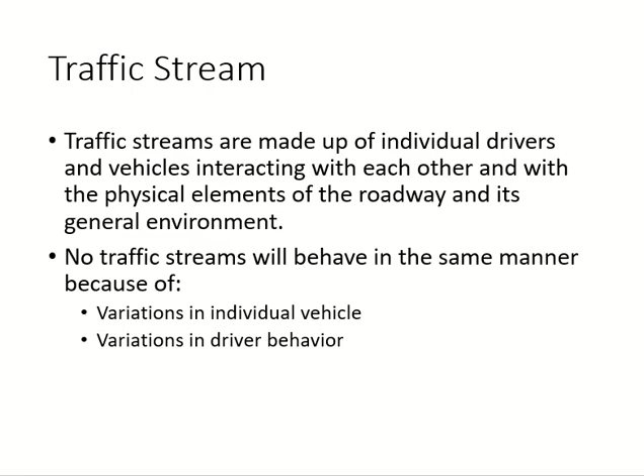Okay, last time we started with the first lecture, from chapter 5 and 6, focusing on this outcome of the course where you learn about the basic concepts of traffic engineering. We talked about what is a traffic stream, why it keeps on changing, the normal changes, the routine changes, and what traffic flow facilities we have. We have two types, interrupted and uninterrupted, and the main difference between them is the intersections.

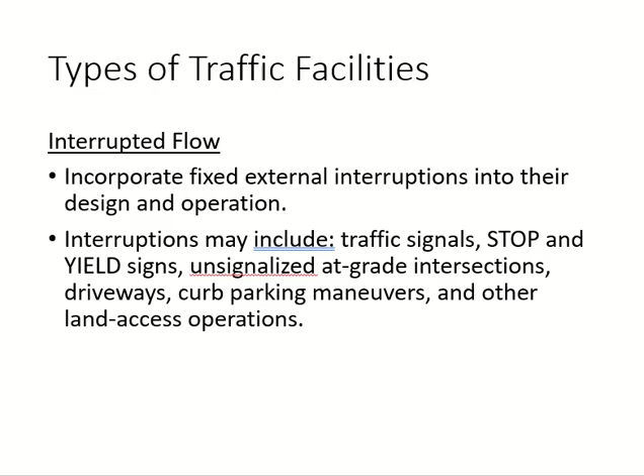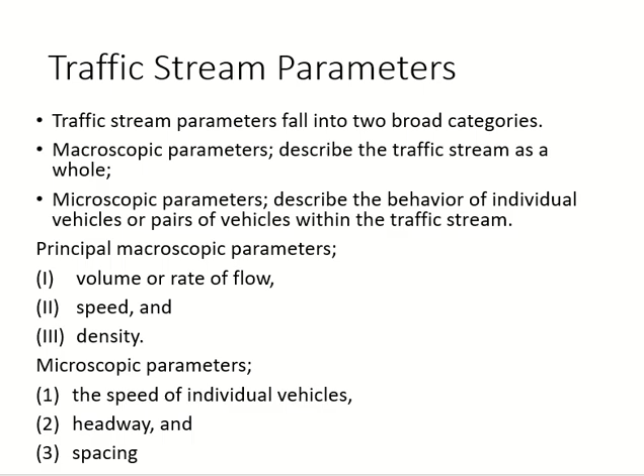Then we moved on to the discussion of traffic flow parameters. Again, they are divided into two types, macroscopic and microscopic. Macroscopic, you are looking at the entire traffic stream. Microscopic, you are looking at each vehicle maybe. And these are the three under each category.

We started with the first macroscopic parameter, which is volume. We define volume as vehicles per unit time. Based upon the unit of time, we can call the same thing volume, flow, or rate of flow, but all of them are vehicles per unit time.

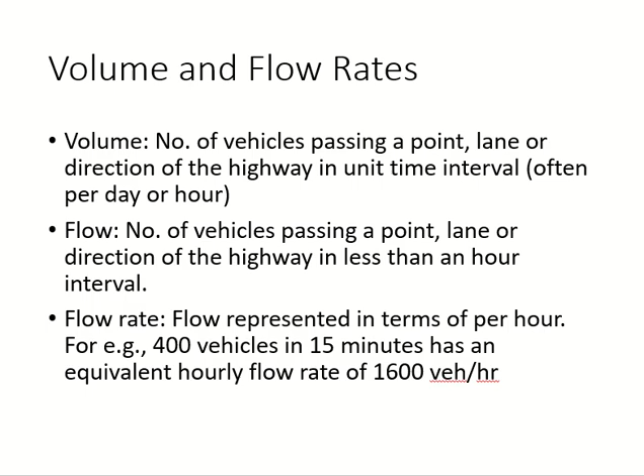So if you have a unit of time of 1 hour or more, it's volume. If you have less than 1 hour, it's flow. And how do we get the flow rate? Per hour, yes. And then daily volumes are used for planning purposes.

If you are planning a highway or a bridge in the future, then you need daily volume, and it basically gives you the total demand of the highway, irrespective of whether people are coming or going, or using it in the morning or evening. It's not detailed, just one number for the whole day.

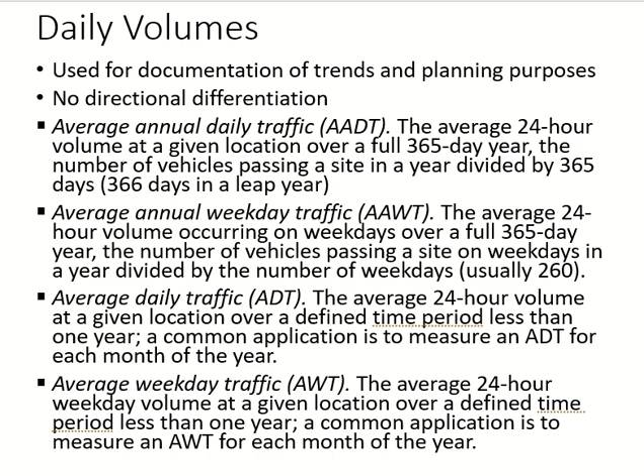And that can be averaged for the whole year including all days, AADT. It can be done for the whole year including only weekdays, AAWT. It can be done for all days less than 1 year, ADT, and all days less than 1 year only weekdays, that will be AWT.

We looked at this example where you can calculate the total for the whole year, because you have total volume, all days total volume, weekdays, you know the number of weekdays, you know the total number of days, and then you can calculate the ADT and AWT for each month as well.

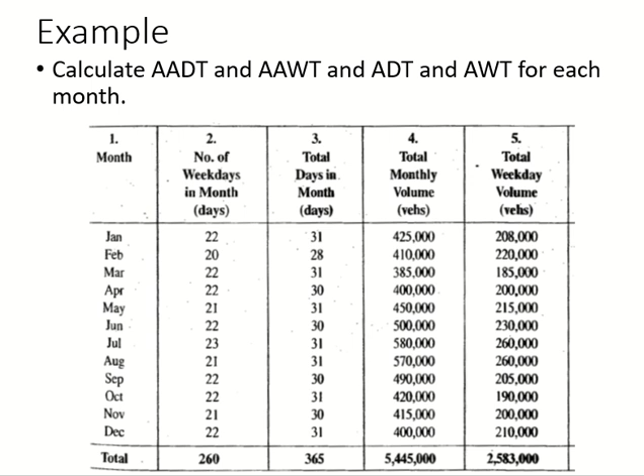But AWT and ADT can be for anything less than 1 year. So here the data is 1 month, the minimum unit is 1 month, so monthly. It can be weekly as well, and later on you will see some other ways of taking ADT.

Then we talked about hourly volume. Hourly volume is used for design. But you are doing the design for the future, and for future you have the total demand. So you have to convert that total demand into the design hourly volume you need. So we need the factors, factor for peak direction, factor for peak hour.

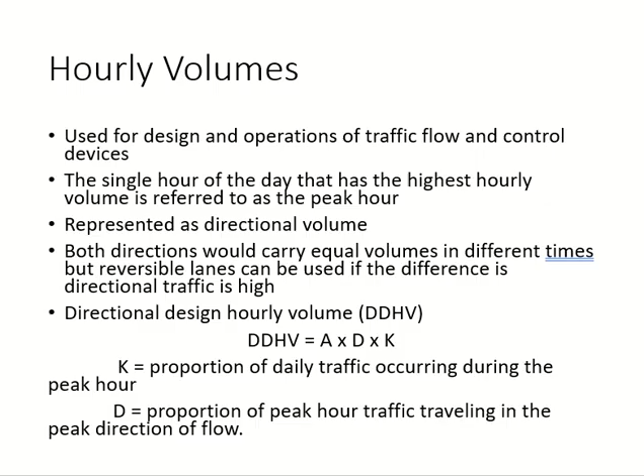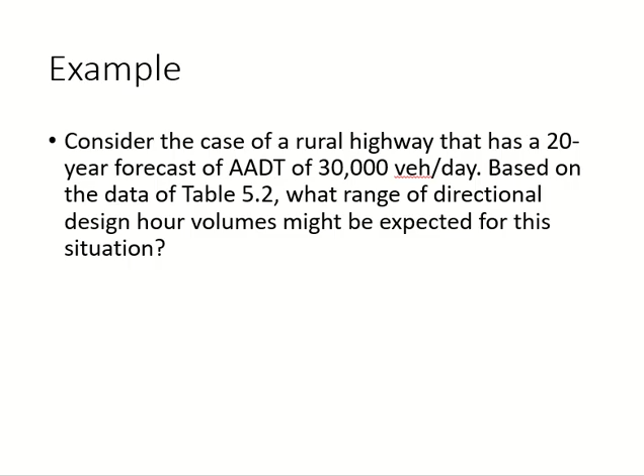And you cannot allow that much change in your design, that much variation in your design. So that's why the key point was these factors should be local. And they should be from the type of highway you are trying to design, because even here you can see it's not the same range for all highways in all areas.

So if somebody goes and says, I will build a new bridge on Sheikh Salman Highway, he cannot take the factors which are calculated using local street data. They will not match.

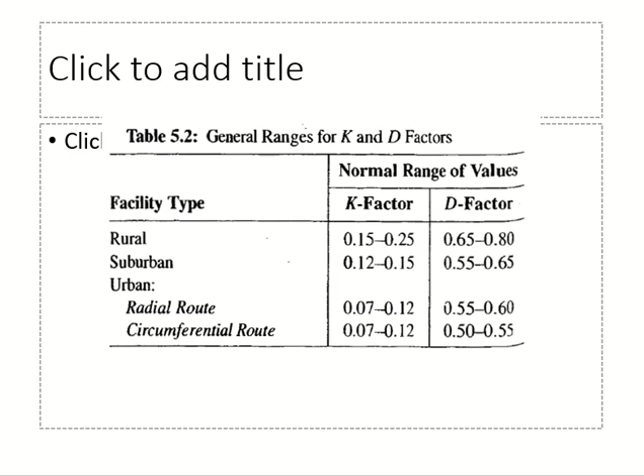So daily volume for planning, hourly volume for design. Then what is the role of flow? Why do we go into the hour and look at different intervals of the hour? How many vehicles, for example, in 15 minutes? Why do we need to do this if my design is complete with hourly volume?

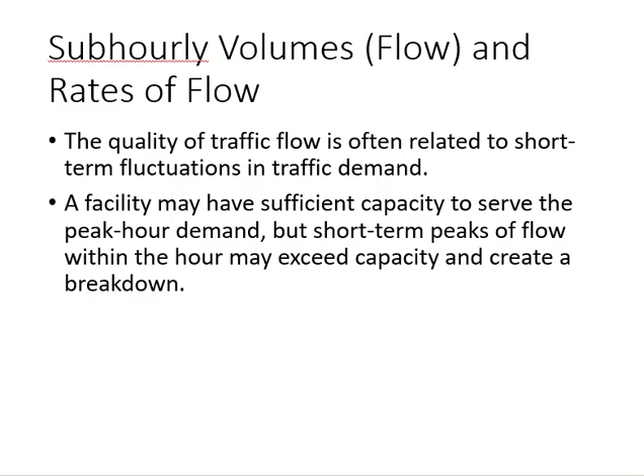And this is the example in which we saw the effect if you do not consider the flow. And I gave the example of a structure. So your total load can be the same, but instead of a point load, you assumed it to be equally distributed. Your building will fail not because you did not consider the load, but because you did not consider the point of the load. The same thing happens with traffic flow as well.

If you do not consider the variation in time, your highway will fail. It will have congestion. And we looked at this example.

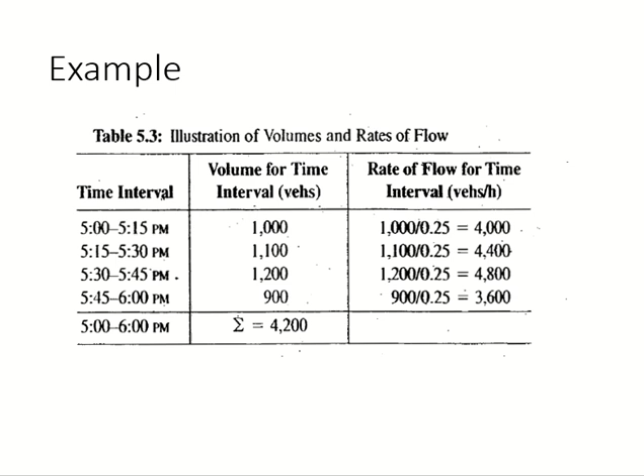So we need to include one more factor in our design to accommodate for the fluctuation of flow, to accommodate for the change in flow, the distribution. Can we design for the maximum? Yes, we do.

But we include that maximum by way of a factor, because imagine you are designing a highway which is not there. So this example shows you the effect of flow, but the actual problem is not this. Here, which one is maximum? This one, right? So I convert this into flow rate and I have my value for design. But who will give me this value? There is no highway. I cannot go at 5:15 and 5:30 and 5:45 and look, there is nothing.

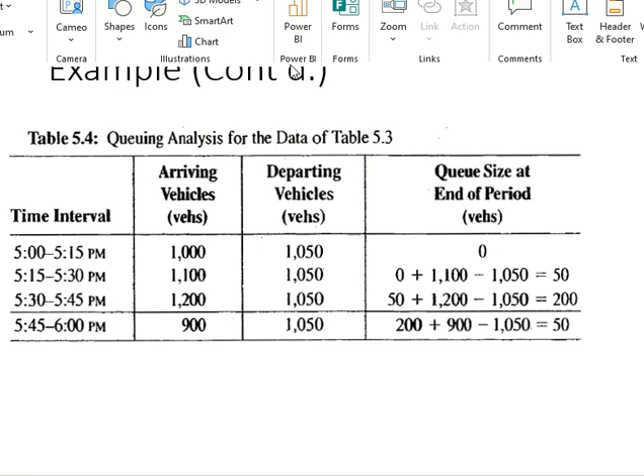So how do we calculate peak hour factor? You take the total hourly volume of your highway divided by peak flow rate. So if you go to this example, your total hourly volume was how much? How much is the total here for 1 hour? Total 4,200.

Okay, divide by peak flow rate, and as you said, flow rate, you have to convert the flow into rate, rate of 1 hour. My peak flow rate is this one, my peak flow is this one. So I will convert this into 1 hour. This will give me the peak hour factor.

Clear? Any questions? So one is the total of the 1 hour. The denominator is just the value of peak flow converted to per hour.

Any questions? What is 4 here? What is 4? Very important question. 4 is because it is 15 minutes. So I'm trying to convert 15 minutes to 1 hour.

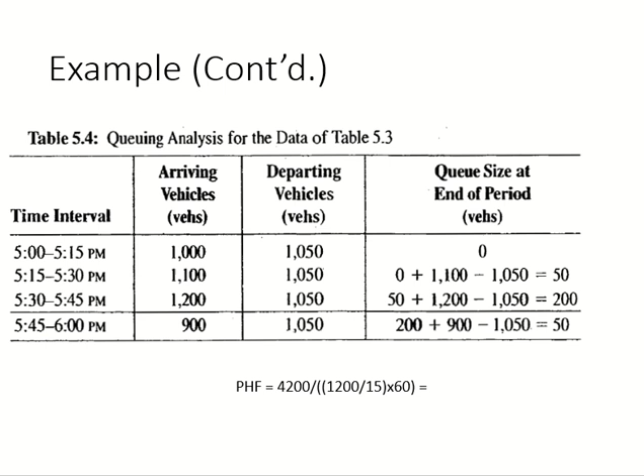There's a rule which they call garbage in, garbage out. For example, if I missed a zero here, so I did 420 upon something, I'll still get an answer, right? But the answer will be very, very low. Instead of 0.8, it can be 0.0 something. If you know what you are calculating, what is the range, then you know your answer is wrong, and you will check it.

But if you don't know what you are doing, you just write it and go ahead. And I already told you about myself - if you don't know, I don't know what you did. So you have to keep these things in mind.

So peak hour factor has a range 1 to 0.25. 1 means equal distribution. But equal means what? This and this should be equal, right? So your hourly volume is same as your peak flow rate. So whatever was happening in the whole hour, the peak 15 minutes are showing the same thing. So if I took the 15-minute value and distributed for the whole hour, it will get me the same answer. This upon this will give me 1. So this is why we have 1.

And 0.25 means what? Now again, 0.25 is if you are taking a 15-minute interval, which we normally do. This minimum value is because we are taking a 15-minute interval. So how do we get 0.25 here? 0.25 means 1 upon 4. So what will become equal? I will only be left with 1 and 4, right? So V and V15 are equal.

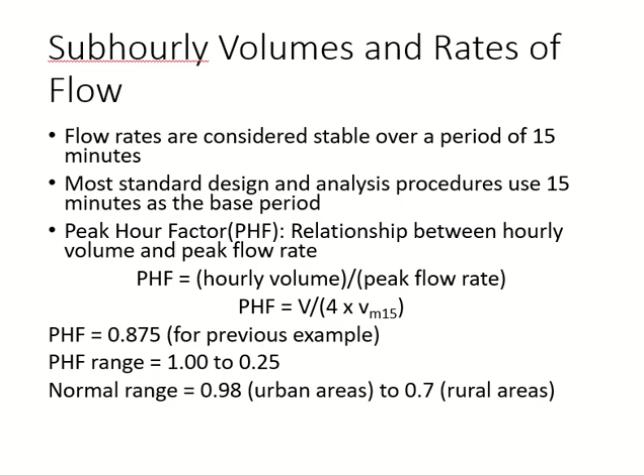Another macroscopic factor is speed. Now throughout the course, throughout the book, you will see that speed is always discussed with travel time, because they are interrelated. If speed increases, time decreases. And obviously you can calculate speed using distance upon time as well.

When we say travel time, it is not taken for a small section - we don't take travel time for a small part of the route, that will have too much variation. So travel time is normally taken for the entire segment. Some of you are now selecting the routes, the parts for your term projects - so the whole part will be taken for travel time. Speed you can take any 50 meters, no problem. But if I ask you for travel time observations, which I am not doing now, maybe inshallah next semester - so don't repeat the course - the travel time will be for the entire segment.

So this is like the normal rule that we follow: speed can be for the whole segment, for a small part, or even for a point as well, but travel time is not like that. So if you tell me you recorded travel time of vehicles passing in these 20 meters, we will discard these observations, we will cancel them, we will not consider them for travel time. For speed, yes, we can consider it. Travel time, no.

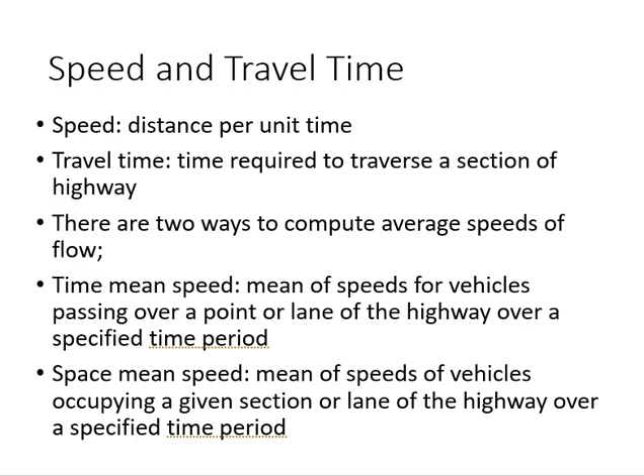So which one will need travel time? I told you about travel time. Which one can be calculated using travel time? Space mean speed, space mean speed, because travel time we take for the entire section. But you will see throughout this course that ideally it should be taken from here, but the real world is not ideal, so we have to look at some other method of calculating space mean speed as well. So this is what you will see now.

So the first equation is for time mean speed, the second equation is for space mean speed. Now distance upon time equals what? Speed or velocity, right? So you can replace in the first equation d upon t with speed. The first equation doesn't have to be summation of d upon t, you can do directly summation of speed, summation of velocity. The equation is still valid.

So if you are using a speed gun, a radar, or some device which can give you the speed directly, then you will use that speed, you will not do distance upon time. But if you don't have any means to observe or get the value of speed directly, then you are only left with the option to do distance upon time. So the equation is showing you the general term, but if you don't have the device, you can do distance upon time as well.

N is the number of vehicles which you have observed for the speed. In the second case, we have the distance, and then we are doing summation of t upon n - in the second equation, the denominator can be called what? Summation upon number is some average, right? Average of time. So distance upon average of time.

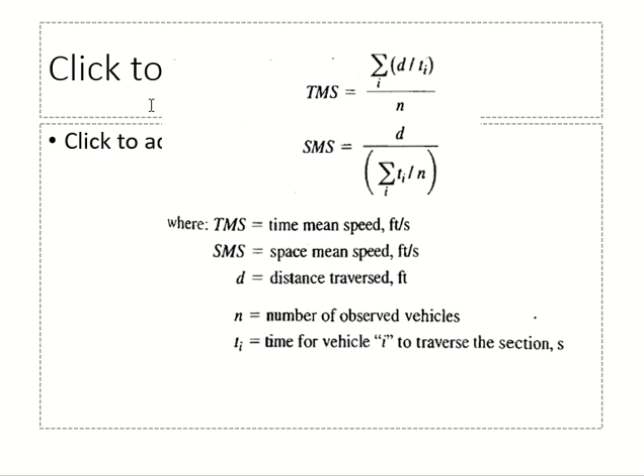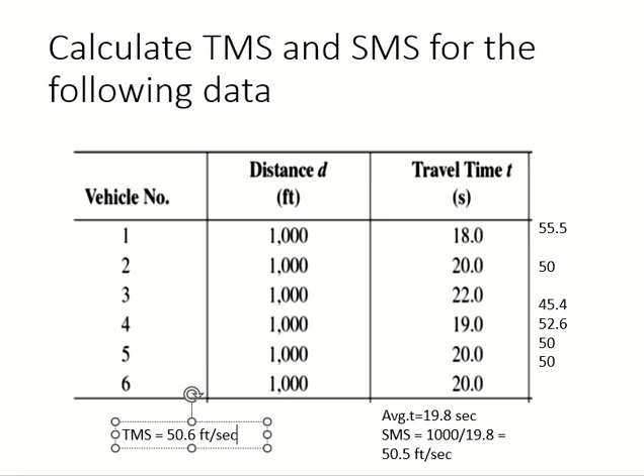Okay. There is only one special case in which both of them can be equal exactly, when the vehicles, so how many vehicles are we taking here? Six, right? If all these six vehicles go from point A to point B with the same speed, not same speed as each other, but like, what was the speed at point A of vehicle 1, it remained the same till the last point for vehicle 1. Okay, so if it was 55.5 for vehicle 1 from point A to the end point, okay, it was 55.5, no acceleration, no deceleration. And same thing for vehicle 2, if it was 50 at point A, it remains 50 till point B, not going up and down and then reaching 50, no, constant 50. Okay, so only in this case you have the scenario where both of them are exactly the same, time mean speed and space mean speed are exactly the same. Because what did I say about time and speed? We are not considering any variation, right? Time and speed, there is no variation. So if there is actually no variation, then both of them are the same. Got it? Clear? So, but this is obviously a very special case.

Okay, the last macroscopic parameter is density. What is density?

What is density? Mass per volume. Volume means space, and mass is the quantity of the material you have, right?

So in case of traffic, how do we measure traffic? Number of vehicles. And space is the road, right? So traffic density is number of vehicles per unit space of the road, per unit length of the road. Clear?

And you can make it per lane as well, or you can make it combined. You have 3 lanes, number of vehicles in all 3 lanes in 1 unit length, or number of vehicles in 1 unit length in 1 lane. So density can be per lane or density can be total for all lanes.

And your length can be kilometers or miles depending upon which unit system we are using. Wherein we use kilometers, right? The book is using miles.

Now the problem with density is its measurement. If I ask you to go to the highway and get me the density of vehicles, what would you do? How do you get the density?

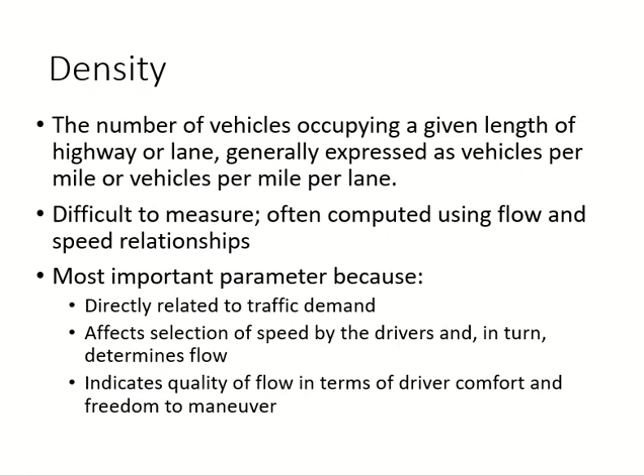Comfort is important, freedom is important. And it's also important that you should not have too much freedom, because then you start thinking, should I be comfortable or not? So yes, these things are important, but we cannot measure them. So density gives an indicator of these things, which we cannot usually measure. So these are the three macroscopic parameters.

Calculation of density, we will look at it later on. But for the time being, keep it in mind - you can measure it using a device, or calculate it using other parameters, and you look at the calculation. Some of them will come in these slides as well.

We already talked about spacing. There is a spacing when you go driving your car, you go for the test. The instructor is beside you, he is busy on the phone. They are always like this, right? No? Who did you go with? He was not busy on the phone. Maybe it was before the phone got invented.

Okay. The problem is he can leave and he will still pass. So stay.

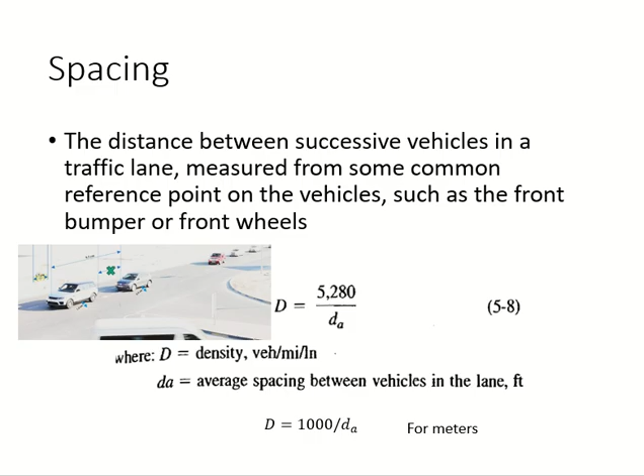The first application of microscopic parameters I already showed you here, more importantly here. What am I doing with the spacing? Calculating density. And I told you calculation of density is not so easy, so microscopic parameters can help you get macroscopic parameters. So although I need macroscopic, I can get micro and then convert them to macro. So this is one of their uses: density, rate of flow, speed. But what is the condition? Average - the micro values should be average values.

Another thing I briefly mentioned earlier about these parameters: in some cases in traffic, we want to study a specific type of vehicle, or a specific type of driver. You cannot do it using macroscopic values, because macroscopic is one value for the entire group. So I tell you the rate of flow is 2000 vehicles per hour - but what would it be if all of them were trucks? What would the speed be if all of them were buses, and so on? This type of analysis cannot be done using macroscopic values. So if you are focusing on a specific type of vehicle or driver - old drivers, young drivers, female, male, whatever - the macroscopic values do not give you enough detail to do this type of analysis. So one use of microscopic is to calculate other parameters, and the other use is to study specific types of drivers and vehicles.

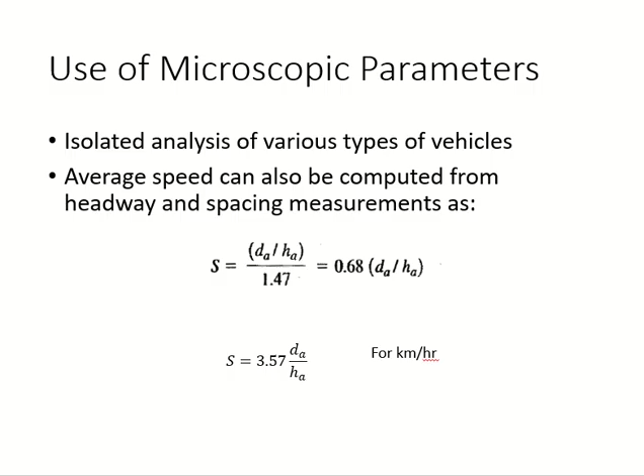When you use any software for traffic flow analysis, they will ask you for microscopic parameters as well. Even if they don't ask you, they are using some default values. So the analysis may be showing only flow rate, density, and macroscopic parameters, but behind them, they are using microscopic parameters. If you just leave it, your results can completely change because you did not pay attention to the microscopic values.

They are using default values: default spacing between two cars is this much, average speed of a car is this much, average speed of a truck is this much, the acceleration of a car is this much. They use these values. If you just leave it like this, you can get different results.

Very quick, simple problem: we have a congested multi-lane highway. The spacing is 200 feet. The headway is 3.8 seconds. We have to calculate the rate of flow, density, and speed of traffic.

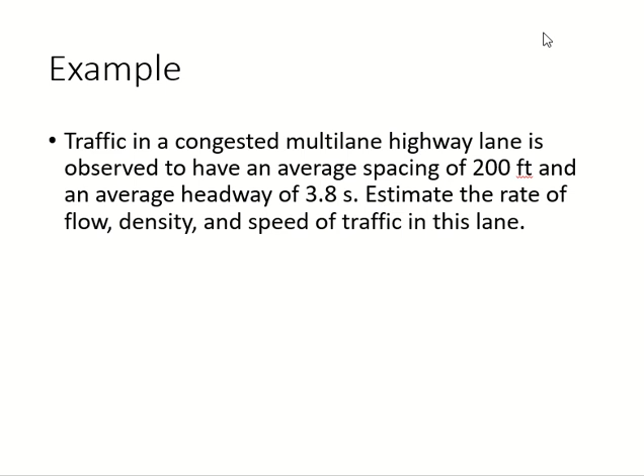Start with rate of flow. Rate of flow is linked with what? I have two values here, right? Which one will give me rate of flow? 3.8, the headway, right? So how much?

And this 200 will give me what? Density. How much? 26.4.

Speed? How do I get speed? Headway? Speed was what? Distance over time, right? So 200 by 3.8. How much? 35.8.

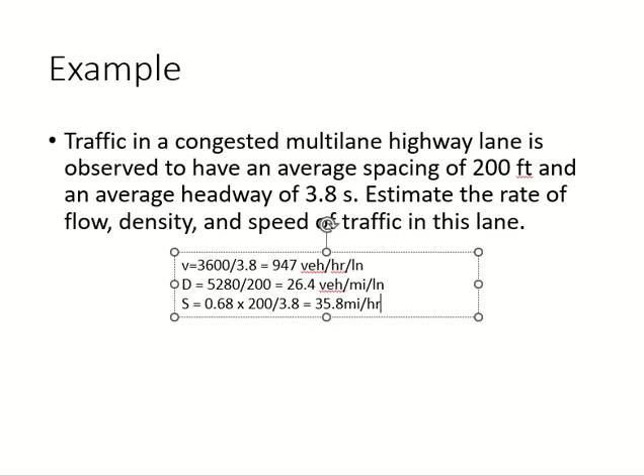Okay, so far so good. This one, what do I do? Tell me, they need density and rate of flow, and they have given me headway and speed. What do I do?

Give the spacing. Yes, give the space. How? You have the speed. Speed equals distance by time. Distance over time. So I don't have the distance, I have the time.

Yeah, the speed is given, right? 55. Velocity, V for velocity. How much is that? 33.7. 33.

194.1. Did you divide by 0.68?

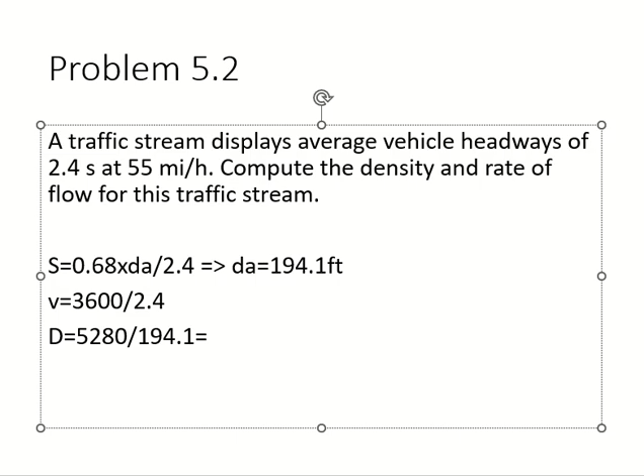Okay. What you see here is the basic equation of traffic flow.

One more item here: we have used speed, or calculated speed, here, as we did in the previous example as well. This speed is macroscopic, because we are using average headway and average spacing.

Macroscopic speeds are of two types: space mean speed and time mean speed. Which one have we calculated here? Time mean speed or space mean speed? Why do you say that? Because I took the average.

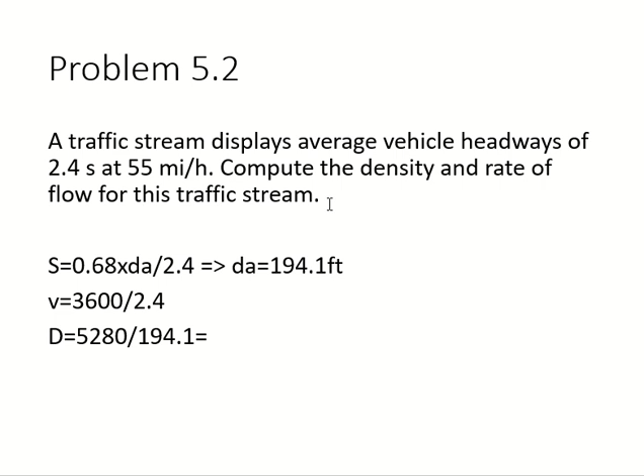Okay, yeah, it is space mean speed. The main concept is that space mean speed should be over the section, over the entire section, and since density is involved here, we can consider the speed to also be over the entire section.

So going back to this relationship: V is rate of flow, S is speed, and D is density. So rate of flow equals speed into density. This is called the basic equation of traffic flow, the most important relationship of traffic flow, and you can see all three macroscopic parameters are there.

Speed here is space mean speed, because it's the equation of traffic flow. Density is vehicles per kilometer or mile, again over the whole section. So space mean speed is over the whole section, density is over the whole section. What about flow? Is flow over the whole section?

How do you measure flow? If I ask you to get me flow, what will you do? Per time, right? So there is no section involved here. So you have to put a restriction on this equation. You cannot just use it anywhere you want, because two of the parameters are for the whole section, and this one is not.

So what restriction do we have to put? When will these two things, S and D, remain constant over the whole section? When I don't change the section.